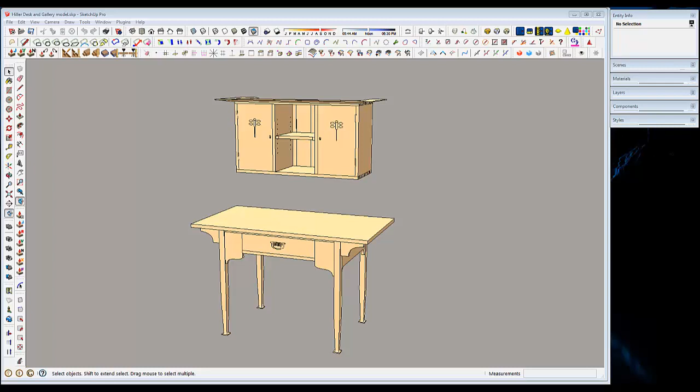For this example, I'm using the dragonfly pattern from Nancy Hiller's Little Arts and Crafts wall cabinet that was featured in Fine Woodworking issue number 228.

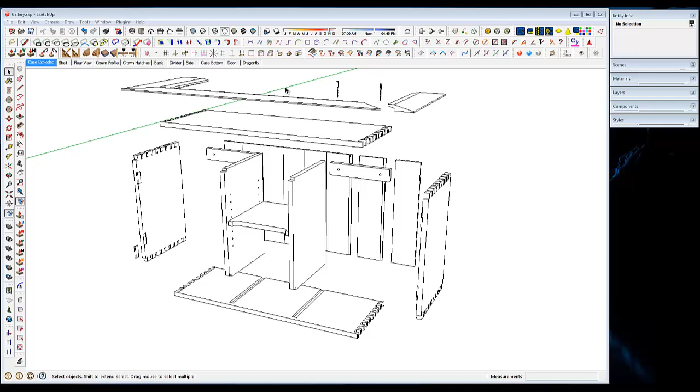Here's the SketchUp file that I used to create the plan document for this little cabinet. When I made this, I created a scene specifically for the dragonfly pattern on the door, and I used that in Layout to create a full-size pattern that you would be able to trace from.

But let's say you want to use a pattern similar to this for your own work, and you want to print this directly from SketchUp full size. This new plugin called Pixel Perfect will help you do that.

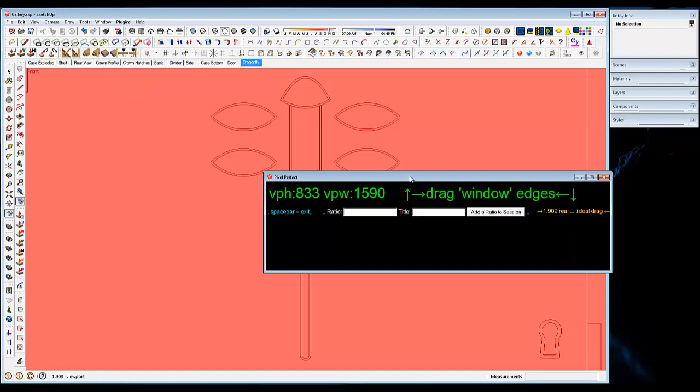We'll go to the Help file and choose Pixel Perfect, and we get a window with some information. It shows us the pixel dimensions, vertical pixel height and pixel width, and gives us some instructions about dragging the window, and it shows us what the current ratio is. 1.909 is what I see here.

That's also displayed in the lower left corner of the SketchUp window. There's a place where we can enter our own ratio and a title, and then add that ratio for this current session. At this point, it doesn't actually save that ratio for later, but if we wanted to make sure we could return to a specific screen size, we could put that in before we change the screen size.

When we're ready to start changing the screen size, all we have to do is click and drag on the edge of the window. We can either work from one edge, the bottom, or a corner, and you'll notice that the background is changing color. When it's red, we're a long way away from any of the preset sizes.

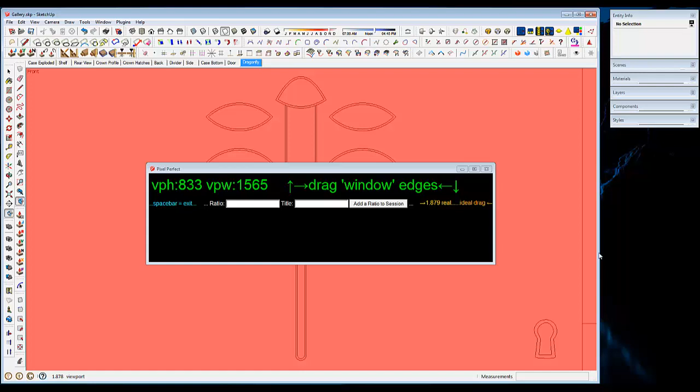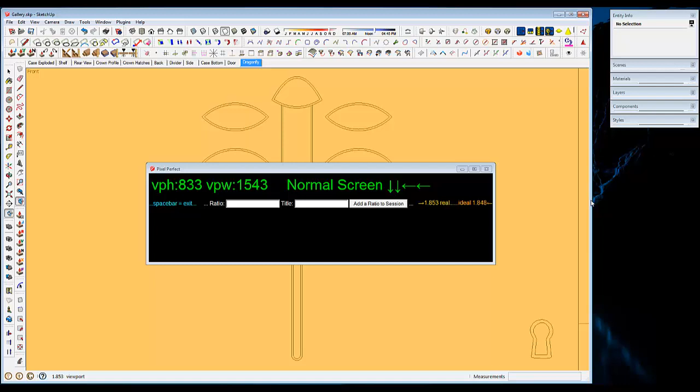I have what I call a normal screen, so it's what I would normally use for drawing, and when I get exactly on that dimension, the screen turns green. You'll notice that when I'm above that, it's a goldish yellow. When you get below the set size, it's more of a lemon yellow. That's intentional to give you an idea which direction to drag.

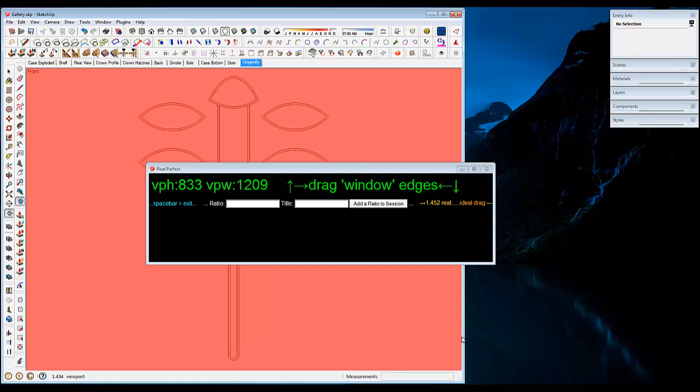If you want, US legal size is one of the default settings. There are several others included. A-series or ISO 216 is another. US architectural is an option.

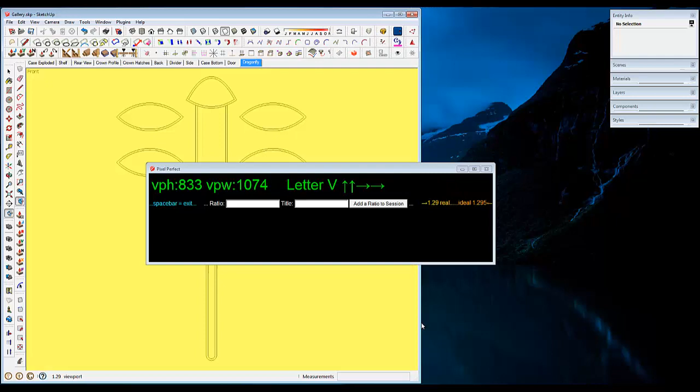Letter size, we're getting, it says letter V, but that's a horizontal letter size. And I'm going to go for a real vertical or portrait shape. There we go. And so now that gives me the proportions of letter size paper in portrait mode.

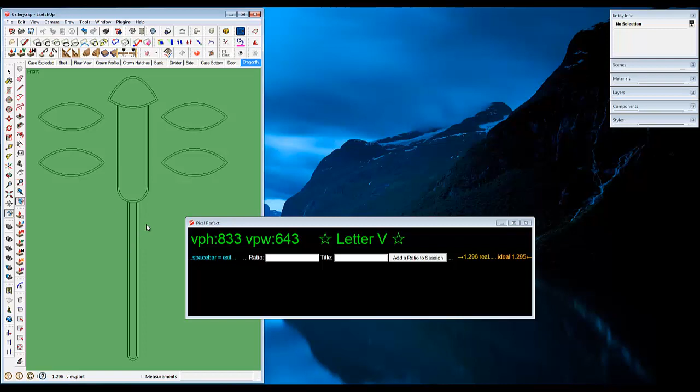To get out of setting this, we'll just click over in the drawing window space and then hit the space bar to go to the select tool. That closes the plugin.

So now if I go to File, Print Preview, I've already set this up once, so I've unticked the box for Fit to Page, and I've also unticked Use Model Extents. I did set the scale so that 1 inch in the printout equals 1 inch in SketchUp.

This is if you wanted to do say a half-life size model or printout, you could set that here and say that 1 inch equals 2 inches in the SketchUp file. And down here it shows the page range.

This is kind of a key thing to look at. It's showing me from 1 to 1, which indicates there's only one page that's going to print, which is a good thing because I wanted that to show on my single sheet of paper.

So I can just click OK, and here the print preview window shows the way that Dragonfly pattern will print on a sheet of letter size paper.

So that's pretty straightforward. Once you've made those settings for print preview, you can go ahead and either click on print, or you could make changes to your model and then just click File and Print.

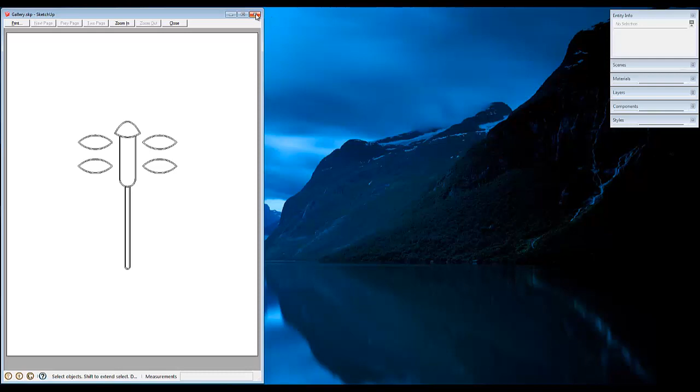This plugin also works in the Mac operating system, which is nice. It's not going to be very useful for people who have remained using SketchUp 8 or an earlier version, because the toolbars get stacked as you change the size of the drawing window. If you have been using SketchUp 8 or 7 or an earlier version, you've probably seen that already.

So you're going to want to update to the current version.

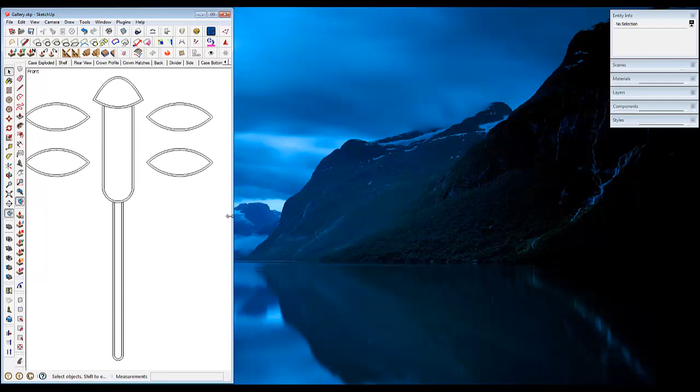When we drag this back, you can see here my toolbars are just overlapping each other as I reduce the size of the window, but when I come right back out, it's perfect. The toolbars are all laid out exactly as I had them before.

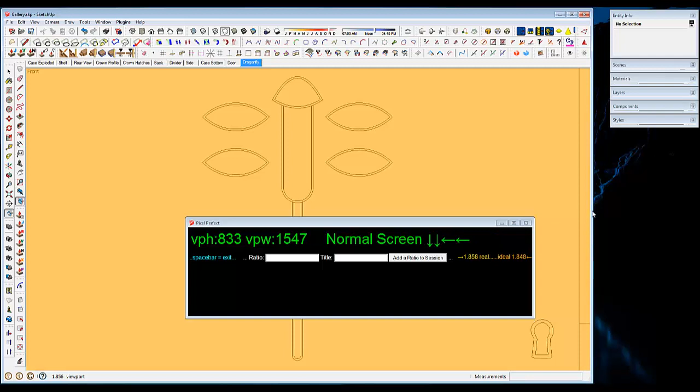I could go back to the Pixel Perfect plugin and drag this back until I get my green window. And there we go. Click in space and hit the space bar to get the select tool, and I'm back to my normal setup.

So this plugin should be released here very shortly, and I will post a link in the blog post as soon as I've got it. Give it a try if printing to scale is something that you'd like to be able to do.